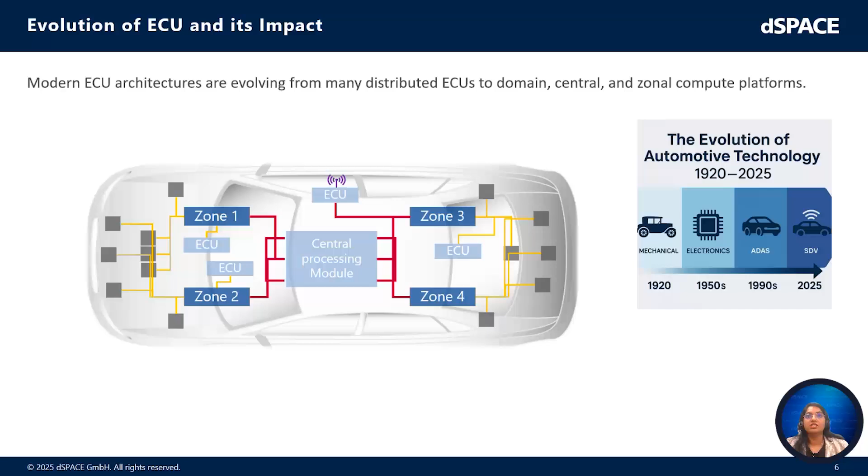Now, with this, what we foresee is that the complexity of the software is increasing. With this increase, we are getting more features. Yes, we have it. So we are going for a more sophisticated lifestyle. Yes, we are, but it comes along with issues, like we have to maintain the safety checks, and what are the faults that are coming in.

The complexity brings in the faults, brings in increased time, everything. It comes in with all the pros and cons along with it. So when we are detecting these faults at the latest stage, it will have increased cost, increased time, and increased risk.

So this pushes us towards continuous improvement, wherein we can go for rigorous testing in a virtual environment and reduce the dependency on the physical hardware. Also, we can see the front loading and the left shift of the validation part. So with this, we say that we are going with a test driven approach, or test driven development. And how is it so? Let us break it down a bit.

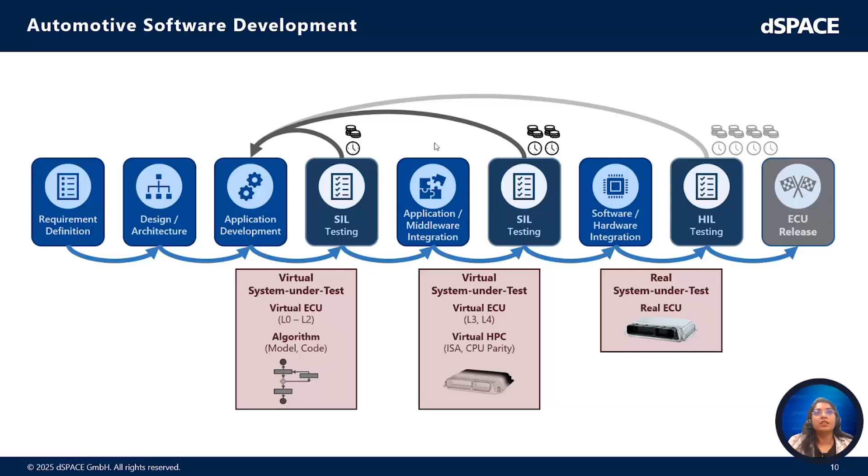What if it is not looped properly? You have a quality check; if you are not fixing the bug there, if you don't utilize it, again you will end up with the cycle, and the whole cycle has to be covered again. So that is how we are trying to develop. Now we are trying to test thoroughly at each level: application development, test it thoroughly; middleware integration, test it thoroughly; software integration testing, test it thoroughly.

How could we do that? Like we are saying, we have to test it. Yes, we can test it. What is the approach that we are taking up? With virtual validation or with ECU development, it is the V cycle that we develop. So we are still using it for the development cycle, but what if we combine it with the agile methodology?

So once the application is developed, test it thoroughly, rigorously test it. Once the middleware integration has happened, test it thoroughly. So like this, when we combine the modern methodology along with ECU development with the best strategic test approach, we can achieve a quality product at the end.

So with that, dSPACE have come up with a test strategy with the V cycle, which gives you a detailed strategic approach, saying which kind of test could be done in which environment, right from model in loop until open road test and field monitoring. Nowhere are we saying we are skipping any level of testing. We are saying please approach this testing in a strategic way.

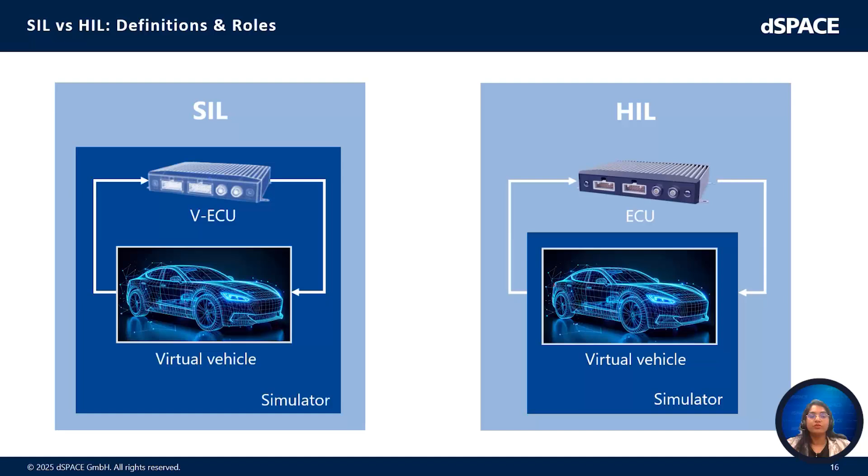So yeah, we have come to know how we have come to SIL, why SIL was adopted, why was the push, everything we have understood. And now we will see what are the roles and definitions of the SIL and HIL use cases. So with the software in loop, as the name itself explains, we are keeping the algorithm or embedded software running on your host PC, which is also interacting with your simulated plant model. What does this typically do?

This typically enables us to do early testing and debugging on the function and software integration level, for example sensor fusion, control, speed control, perception, etc. To test the application or software integration before moving to the prototyping hardware, to establish continuous testing by running rigorous tests after each code change, to make the simulation environment available to development for fast fault analysis. And this enables the left shift of the validation, which saves cost.

Whereas when we come to the hardware in loop, it is with the real embedded hardware and real-time simulation, whereas in the software in loop it is soft real-time or PC-based simulation. Hardware in loop could be used to enable testing with the real controller hardware, to test the hardware-software integration before moving to a prototype vehicle, and ensure deterministic real-time behavior for all the single ECUs, including the communication. Here, you can also verify electrical failures, and it can also be integrated with continuous testing.

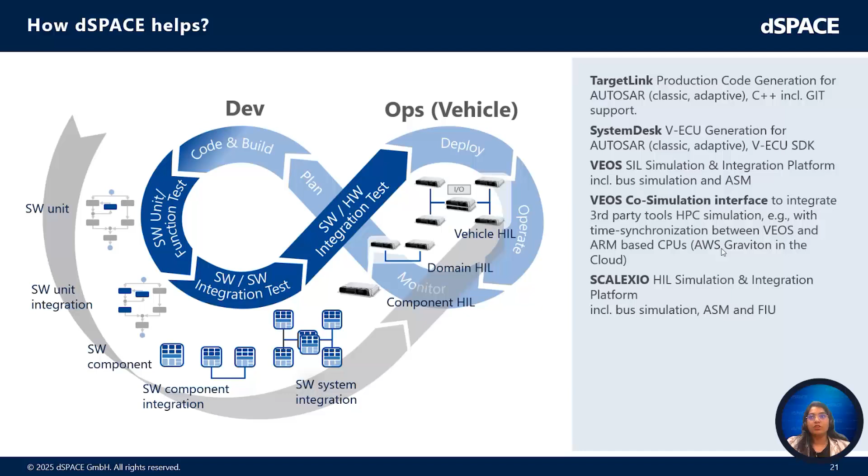When you have the hardware, you all know that SCALEXIO is our major tool, which helps you at all levels of validation when you have the hardware as an artifact to check. VEOS plays another role, where we can also collaborate or co-simulate with other environments through the co-simulation interfaces.

So basically, if we take the VEOS toolchain or the SIL platform in dSPACE, VEOS is the major platform. It enables us to take all the artifacts at different levels. For example, if it is at the modeling level, you can take the SIC files and go for simulation as early as possible. If it is at the functional mockup unit artifacts level, you can also take those in.

And if you want to integrate it and check with the bus simulation or the protocols, then bus simulation containers could also be taken. For virtual artifacts at the level of integrated software components, we can use SystemDesk and go for testing. VEOS also enables us to co-simulate with the SCALEXIO platform when your system under test or DUTs are both software and hardware, and it enables a smooth transition from SIL to HIL.

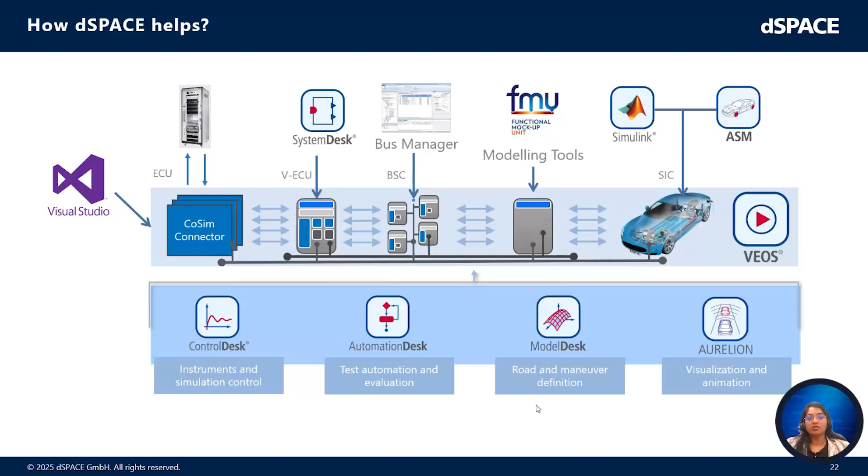The rest of the toolchain, like the experimentation, testing, parameterization, and visualization software, remains the same. So the controls or instrumentation that you have created, from prototyping to software-in-the-loop and to hardware-in-the-loop, can be maintained the same. So we see there is a seamless reuse of data from MIL to SIL to HIL. And this is how dSPACE can come in and help you out.

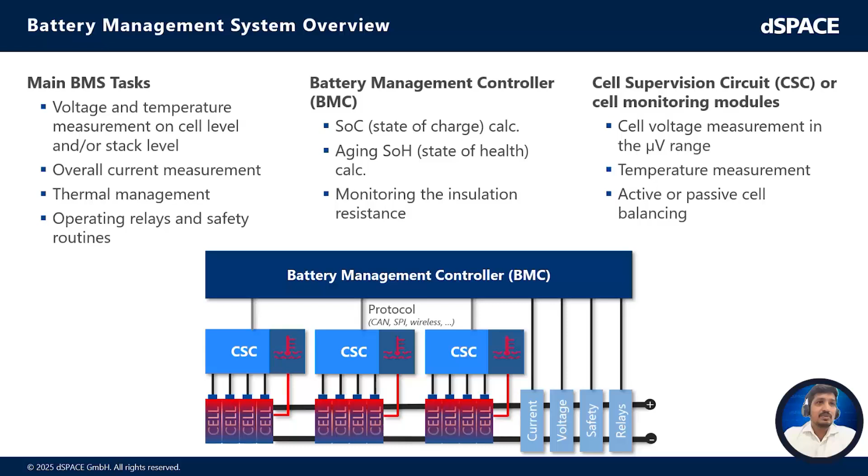Okay, so I will show you the HIL testing part: BMS validation using the dSPACE system for HIL. This is already established and has been well in place in the industry for a long time. Here, if you can see, the BMS is under test, and we also have the CSC under test.

This is called mixed-level testing, which means partially the hardware you have is real, and partially it is within a simulated environment on the HIL. So you can see here how this would look in HIL, the BMS when you integrate it and want to test it. So what happens when you move on to a SIL environment?

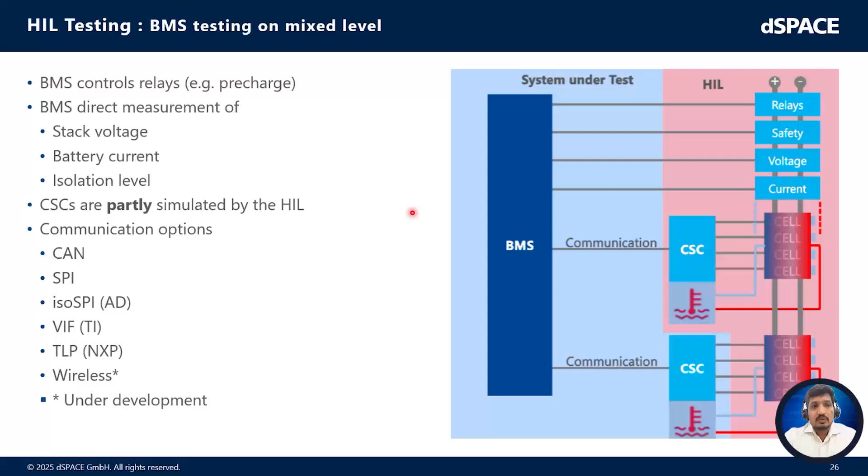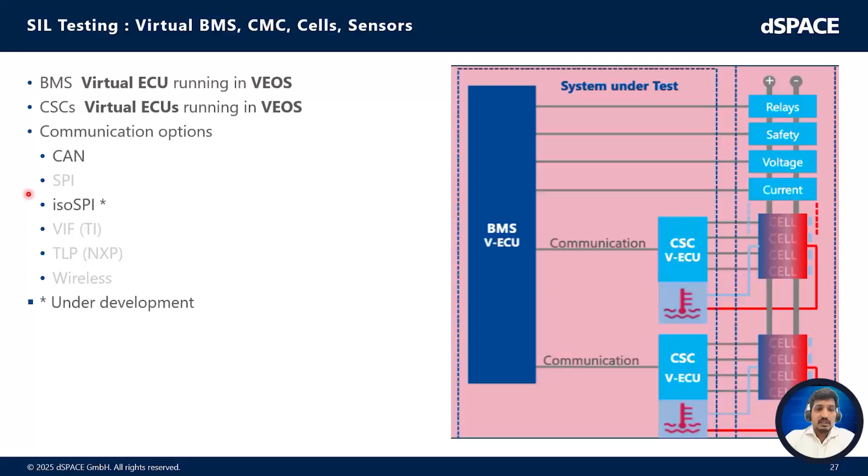Okay, so now I have shown you what we have for the VEOS, virtual ECU. But the major question is, how do you create it? What is it from different OEMs, different tier ones? How do you create a virtual ECU? So for that part, what we would require is only the inputs from the tier one and OEMs: the partially or fully created software, the BSW, ASW, MCAL layer. So if we have all of this, this is the only input we will require from you.

Later, whatever is required, for example, for BMS validation. So for BMS validation, the system under test would be the BMS. Along with that, if you want to validate other environments, how do you integrate your charging system, how is the battery being charged, how is the motor running, how is the battery connected to the load? That is done with the dSPACE ASM models. We provide the ASM models for that. It is already available. And then how do you test it? The testing is done basically with dSPACE tools, ControlDesk, AutomationDesk, and SYNECT.

So if you want to virtualize, if you want to do the SIL related part, then this is the only system that is required, and then dSPACE provides some customizations, and we do support the creation of the V-ECU also. Okay.

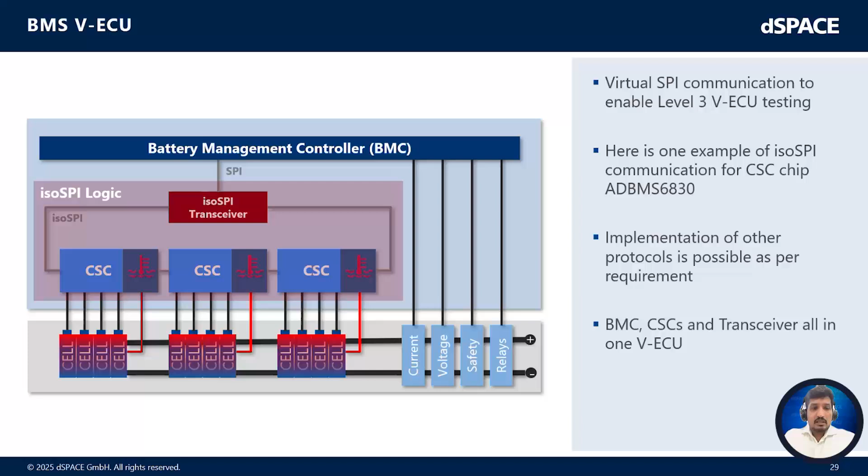And then, taking BMS as a use case, I wanted to stress what could be done on the SIL and what could be done on the HIL. As Swati mentioned earlier, there are some advantages with SIL, there are some advantages with HIL, and there are some test cases which can be done only on SIL, and some which can be done only on HIL. So I wanted to stress on that.

So if you select SIL for your validation, for example in BMS, if you want to validate only the state of charge functionality or the state of health functionality, current limits or battery resistance, with only 3 or 4 of them developed. For example, if you have 10 functions, out of which you only have 3 or 4, you do not have to wait for the others to be developed, you can still validate partially. Okay. This enables early testing, which ultimately reduces your development life cycle.

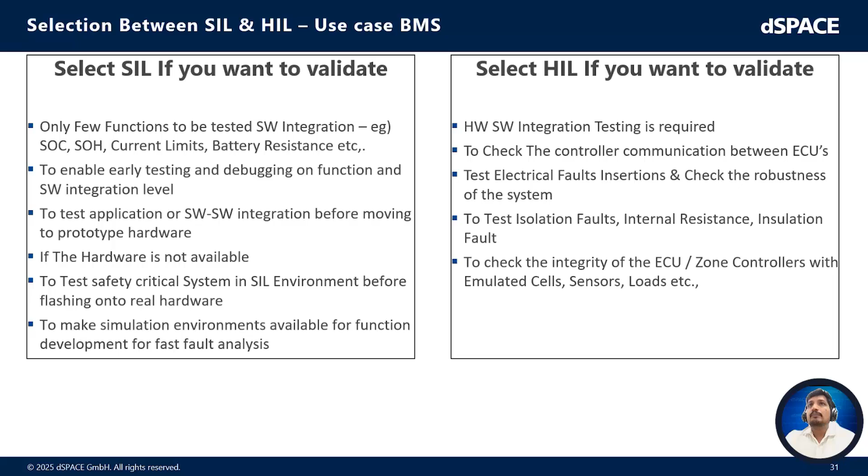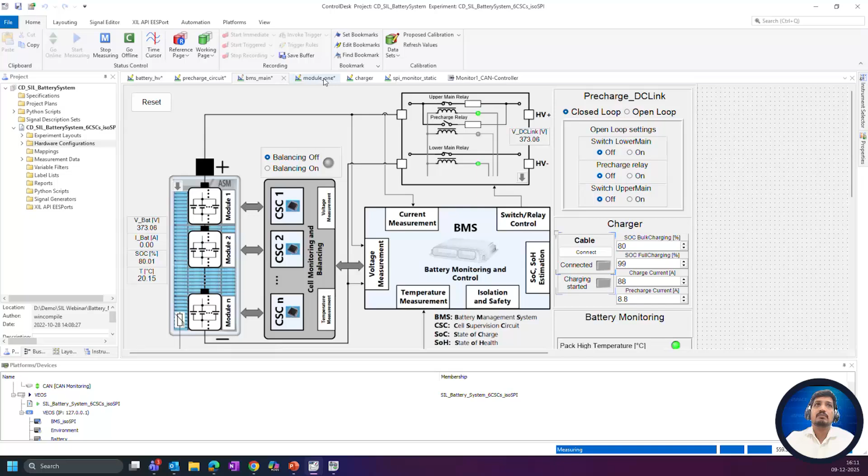So this is the ControlDesk tool, which is used for instrumentation, and here you can see all the layouts of the battery management system. Battery high voltage, loss calculation, entire circuits of the BMS, state of charge, nominal cell voltage, current and voltage graphs, everything we have. The pre-charge circuit, BMS main module 1, where you have each cell, the data of each cell, and its value at any moment of time. This is available in ControlDesk.

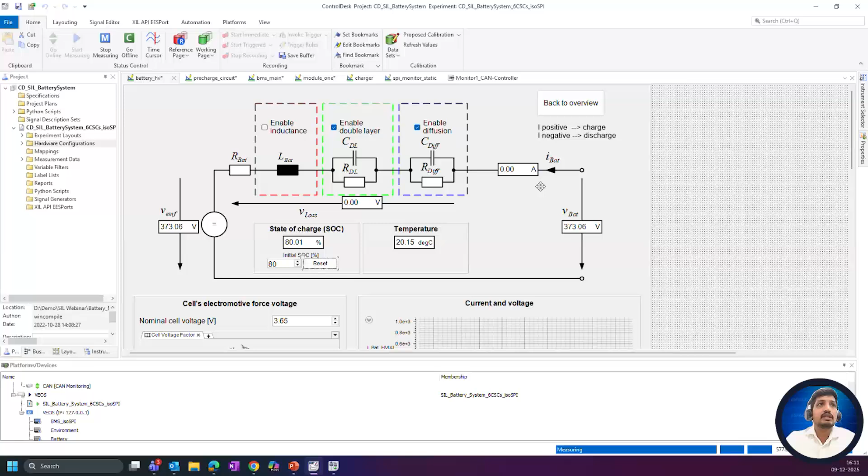And then we have the AutomationDesk tool, where there are some sample test cases which I have already run. I wanted to show you the test I have run. For example, this is the under voltage test, to check the DC link. If there is any reduction in the voltage, or it goes beyond some point, how is it captured, what is happening, whether the test case passes or fails, how do you validate it?

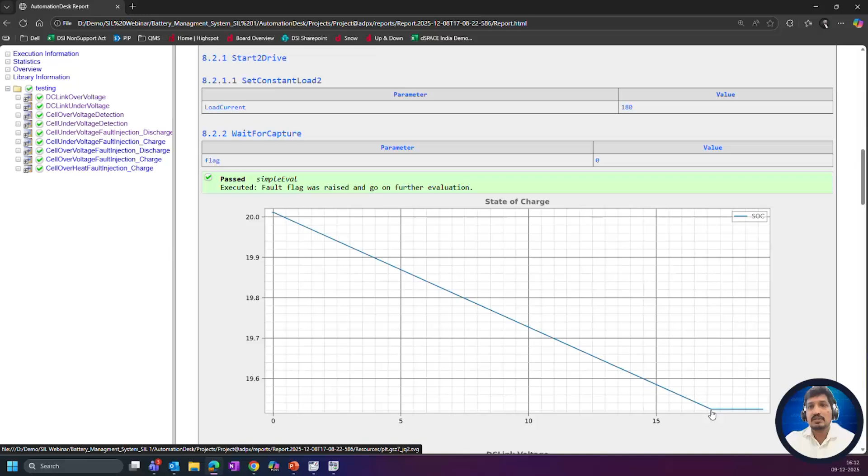For example, I will go to the graph, which will give you more detail. From here I started my test, where my SOC percentage was about 20%. I started to discharge, and once it goes below 19.6, approaching 19.5 percent, I can see there is a fault being triggered from the ECU, for the DC link voltage.

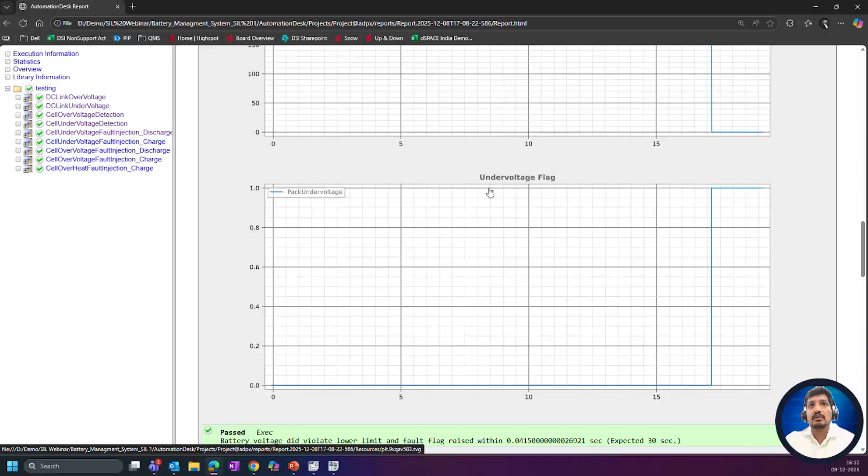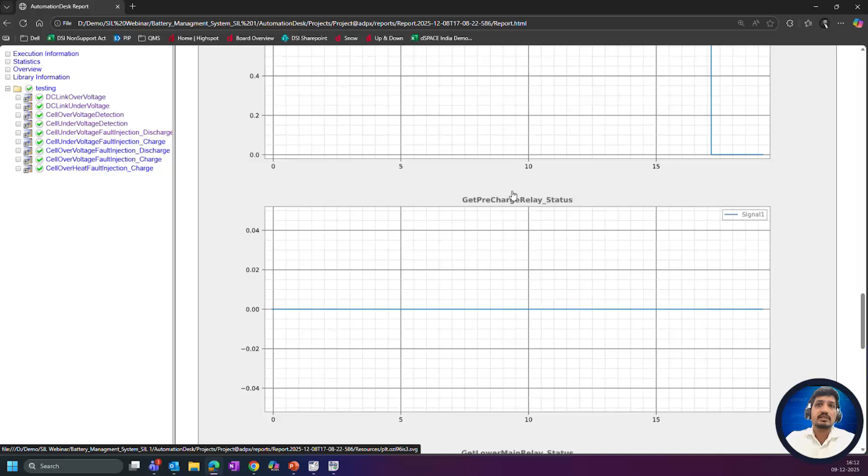It goes beyond, and then an under voltage flag is being raised. So here I can see there is an under voltage fault being raised, and then you can see the status of the relays, whether they are getting opened or closed. So here you can see once that fault is triggered, the relays are getting opened.

Okay, so this is one sample test case, and through this I wanted to share with you that it is possible for you to validate BMS and also other systems using dSPACE tools.

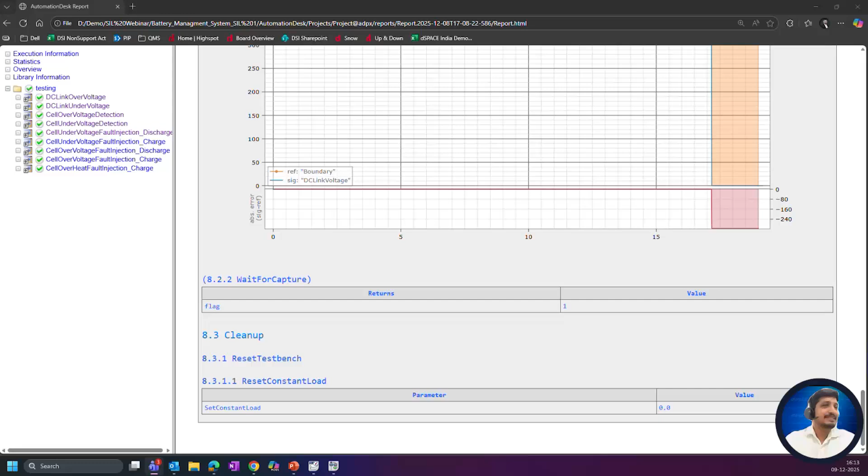Thank you, Lal. I think this was an example that dSPACE provides the tool sets even for all the other applications. For example, here we have taken the BMS use case and we were able to perform both the SIL and HIL case. And if you are interested in having any of the demos, you can reach out to us, with respect to BMS alone or with the other cases also.

And as Lal was explaining, the test results are matching when we run the same test with respect to SIL and with respect to HIL, and we are finding the match here.

So there is one more example from global players like Stellantis, where they have also used the SIL and HIL platforms from dSPACE for their use case. So I'll just walk through what they have done. They have integrated SIL and HIL, and they have deployed dSPACE on the AWS cloud. For the SIL platform, they have used VEOS, and for the HIL platform, they have used SCALEXIO.

For the cloud platform, they have used AWS EC2, and for the ARM cloud platform, they have used AWS Graviton. So with this, VEOS could be coupled with AWS Graviton. As we explained earlier, it is capable of co-simulating with that. And with this, they were able to achieve early testing, early debugging, and seamless integration between SIL and HIL.

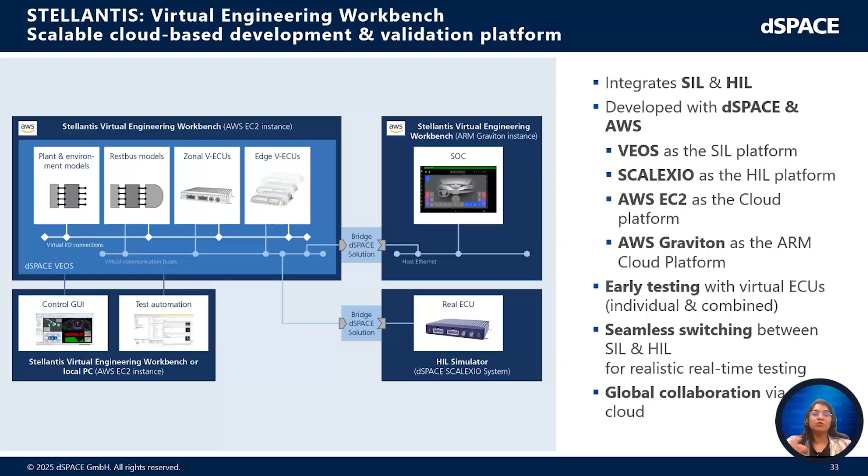And the other thing is that since all these were mounted on the cloud, the global collaboration was very good. So they strategized their test cases so that 80% of tests could be done on SIL, 10% on HIL and 10% on vehicle-in-the-loop. With this, they detected about 80% of the software errors in SIL testing, and this enabled them to be faster to market, and they cut down the validation expenses they were incurring.

Other players who are using the SIL toolchain are GM, Stellantis, Oshkosh, Toyota, and MAN. These are some of the global players who are using the SIL platform and various other tools from dSPACE for virtualization, for validation, and for testing as well.

So that comes to the end. What are the key takeaways from the webinar? If you're starting with early validation, virtualize the ECUs to enable rapid and cost-effective testing. This also reduces the burden on HIL by catching issues earlier. Use HIL for real-time hardware where hardware-accurate validations are needed, and you can ensure realistic performance in the HIL.